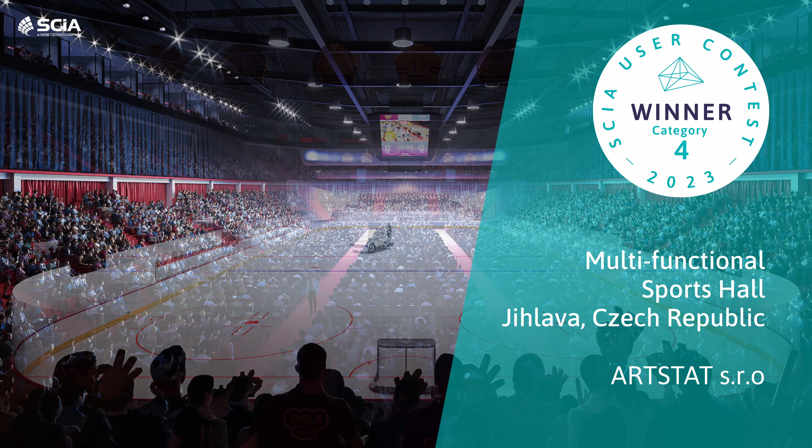We are pleased and honored to hear that we won the prize for Special Structures in SCIA User Contest 2023. This unique project for the new ice hockey stadium in Jihlava city, replacing the unsatisfactory old stadium, began in 2020. I am the main structure engineer for this project within our company ARTSTAT s.r.o, assisting the owner and lead engineer Jan Šulcek.

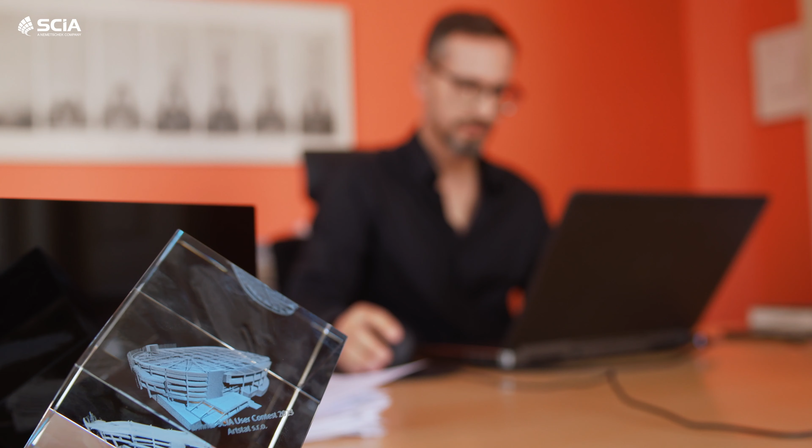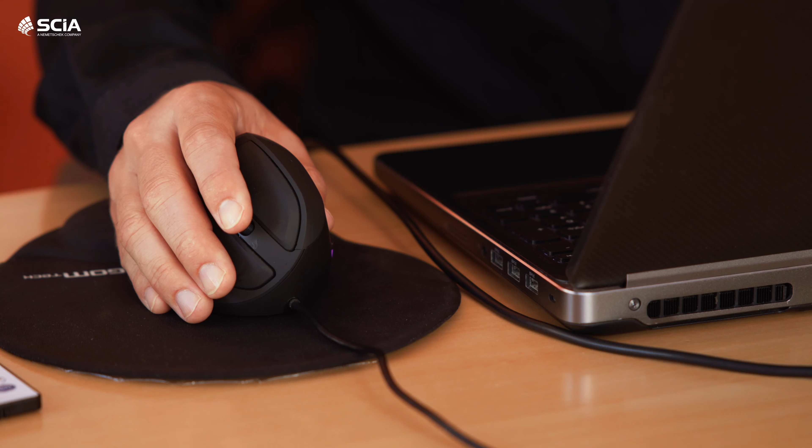There were several technical challenges in this project, such as the complicated shape of the structure, short program, and pressure on the final building price. Due to the limited space conditions and lower floor heights, we were forced to design primary structure elements as subtly as possible. We also paid great attention to the steel structure of the roof with a maximum span of almost 100 meters and the VIP spectator boxes suspended from the perimeter of the roof structure.

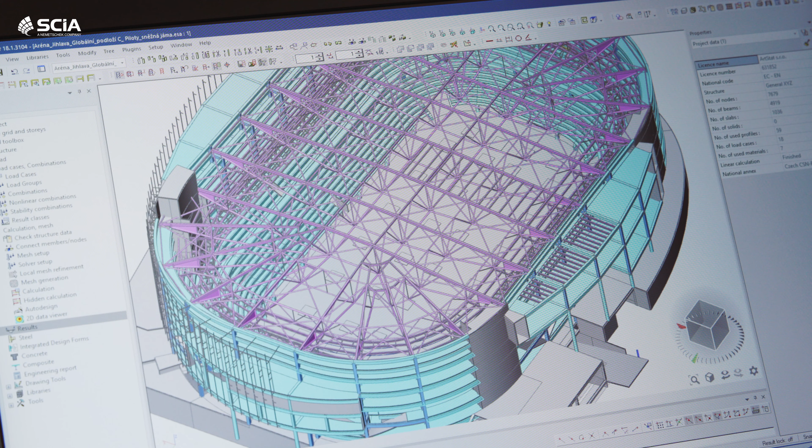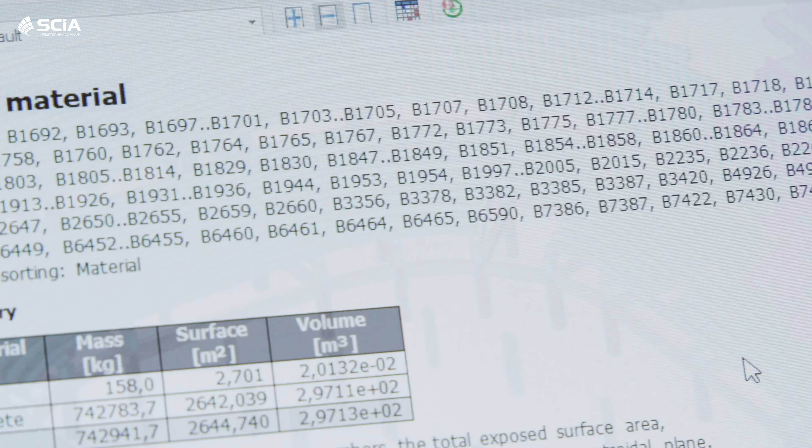For global analysis, we created a 3D structural model of the whole stadium, which contained all 1D and 2D members, flexible subsoil and supports. We also created several partial models for detailed design and checks. The bill of material function allows us to provide the client with up-to-date weight estimations, which provided the most economical solution.

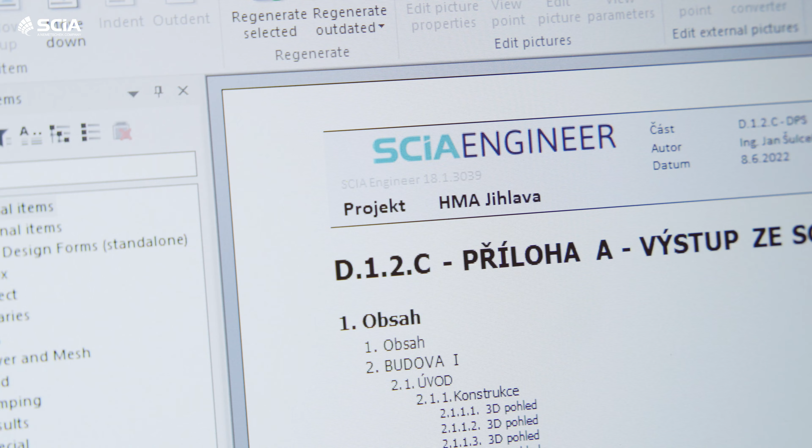SCIA Engineer is a complex tool for structural design. It's user-friendly with a wide range of structural checks and modeling tools. I also like to work with the engineering report, which is very well automated, and tabular results are clear and concise. The function of combining reports from different projects is very useful for large projects like this one.

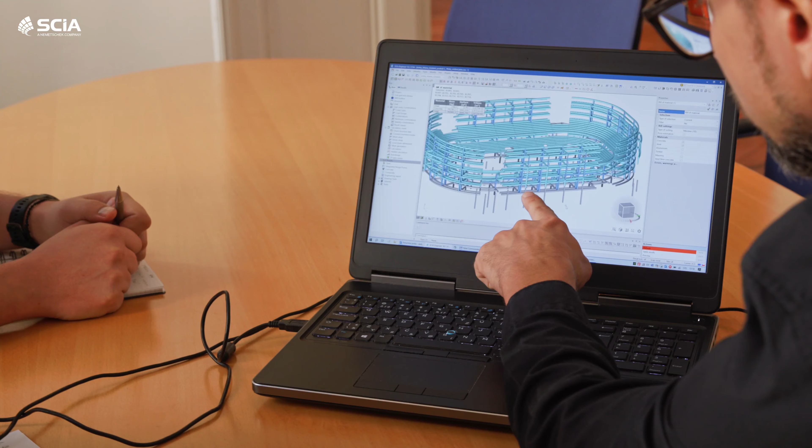I was greatly influenced by my family, where engineering has a long tradition. When I was a teenager, I was fascinated with the possibilities to formulate and calculate the design in large structures and structural elements. Therefore, I decided to become a structure engineer. I get great satisfaction doing this job.